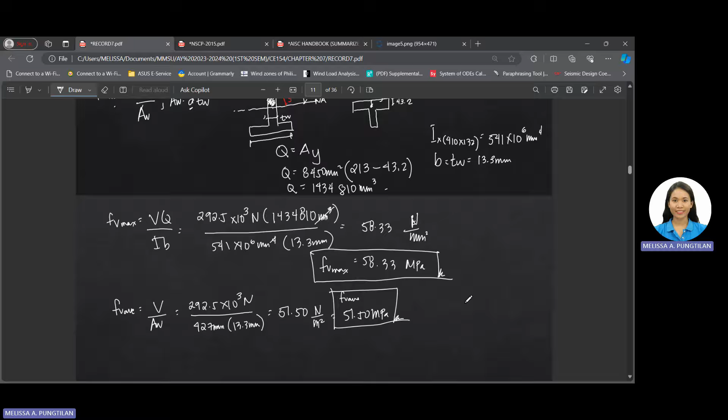So let's proceed sa example number 2. Determine the available shear strength and adequacy of an ASTM A992 W610 by 92 beam loading shown in the strong direction. Ibig sabihin na sa usual orientation yung beam natin, the axis of bending is at the x-axis or the major axis.

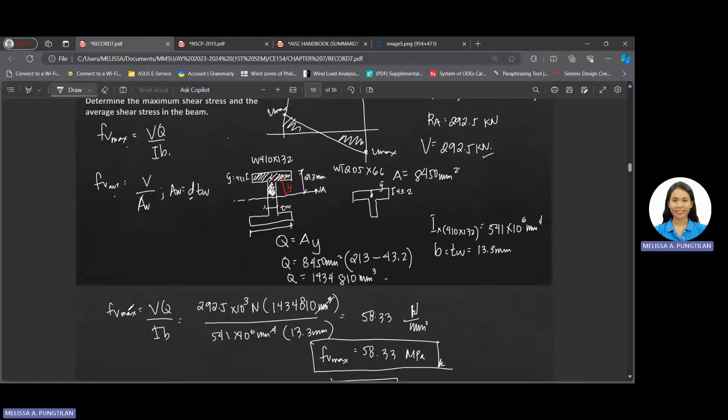So for ASTM A992, the yield strength is equal to 345 megapascal. Ang ginawa natin sa number 1 is we just tried to compute for the maximum shearing stress and then the average shearing stress, para kahit pa paano ay ma-review natin yung pagkuha ng shearing stress.

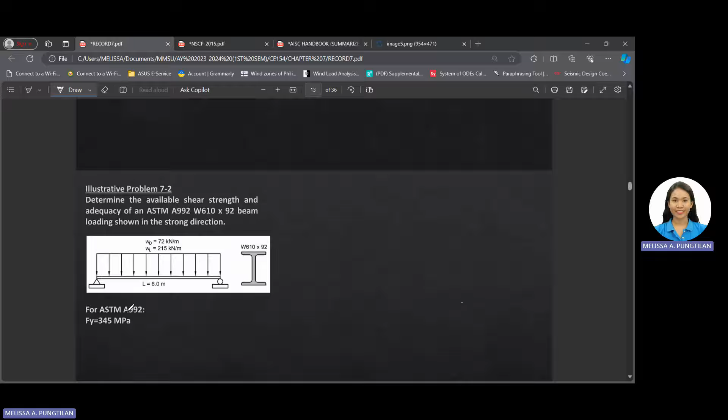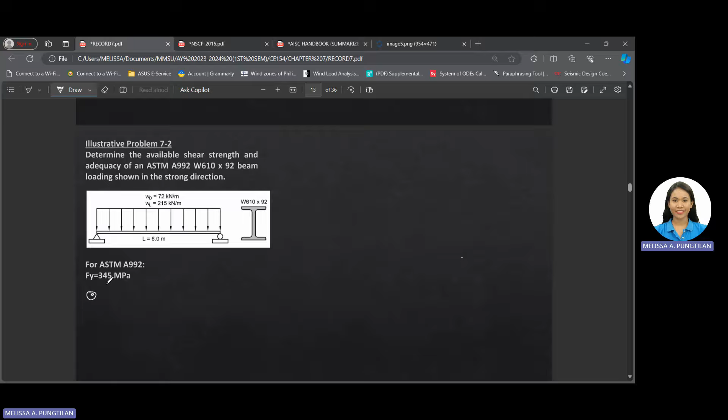At dito naman, we will now check the adequacy of the section for shear. W610 by 92 yung beam natin. Since we are verifying the adequacy of a certain beam, compute muna natin yung required shearing strength.

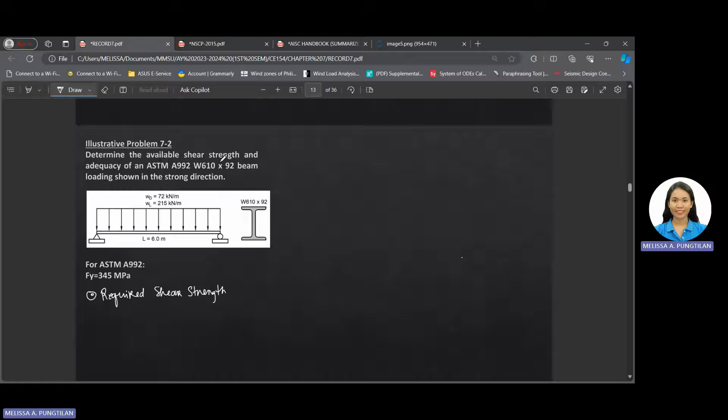Ang gagamitin natin dito is LRFD and ASD ulit kasi wala namang binanggit kung ano yung load combination o yung design natin. Therefore, compute natin dalawa. Sa LRFD, magkakaroon tayo ng WU.

Take note guys, ang hinahanap natin dito is now the shearing force. Just a review: sa tension and compression, ang hinahanap natin is the load P, kinuha natin yung PU tsaka PA. Tapos nung nag-proceed na tayo sa flexure, ang hinahanap na natin dito is the moment, the MU tapos MA. Dito naman sa shear, design of members for shear, ang hahanapin na natin dito is the VU and VA, or the shearing forces.

Dito, ang meron tayo is the uniformly distributed load. So through the uniformly distributed load, mako-compute natin yung shearing forces by drawing the shear diagram. Kasi hindi pa natin mako-compute, hindi mo naman pwedeng i-add na lang basta-basta, kasi sa LRFD, gagamit tayo ng mga tinatawag nating factor.

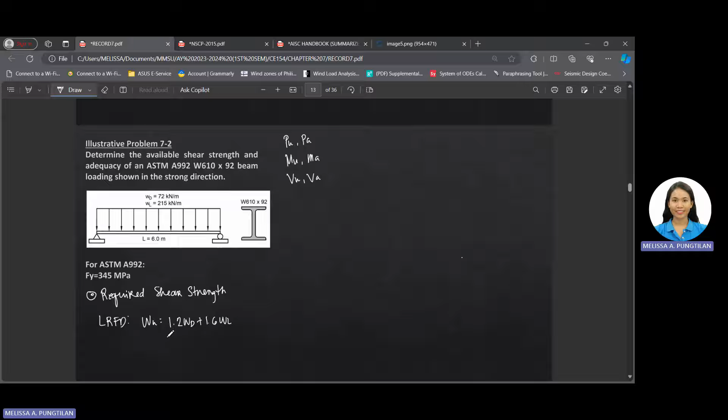Sa W, under LRFD, we have 1.2 of WD plus 1.6 of WL. Therefore, we have dead load natin is 72 plus 1.6 of 215. Therefore, we have 430.4 kilonewton per meter. Ito na yung uniformly distributed load of our beam.

After that, paano natin kukunin yung hinahanap natin na VU? By drawing the shear diagram. Pwede naman kayong mag-method of section, wala namang problema dun.

So nandito na nga yung WU, this is equal to 430.4 kilonewton per meter. Simply supported tayo. Nandito yung reactions natin, let's say RA tapos RB. Distance natin o length is 6 meters.

So by taking the summation of moment at point B is equal to 0, clockwise positive, we have RA multiplied by 6 minus 430.4 multiplied by 6, moment arm 3, is equal to 0. Therefore, RA is equal to, divided by 6, so we have 1291.2.

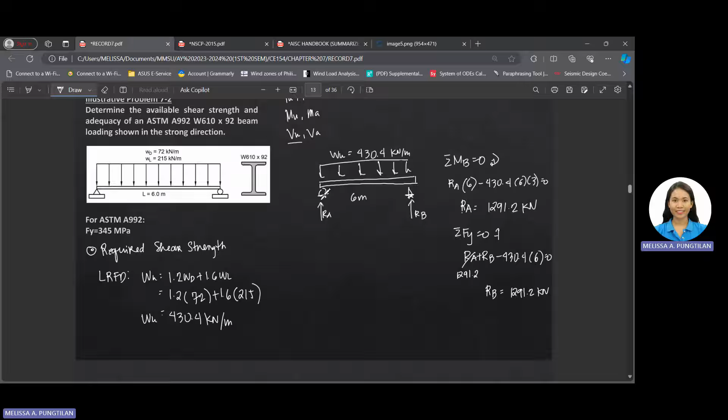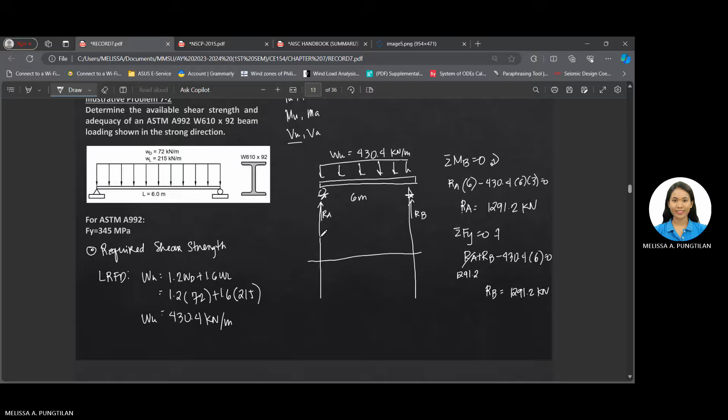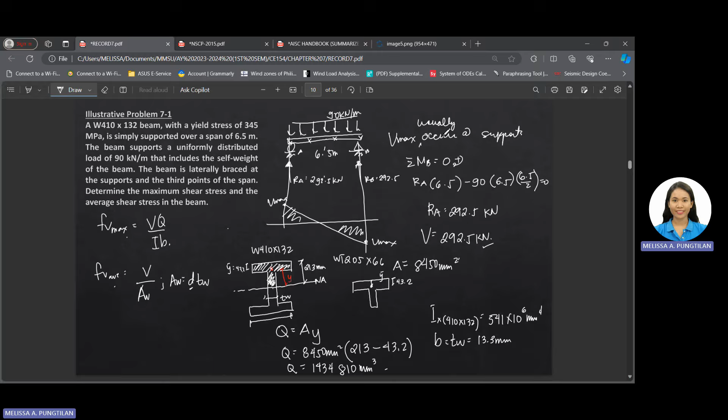Kasi this is just a uniformly distributed load, alam naman natin that the maximum shear will occur on the reaction. Kasi nabanggit ko din kanina dito sa discussion natin, that the maximum shearing stress usually occurs at the support. So kung ano yung makukuha mong reaction, yun na rin magiging maximum shearing force natin.

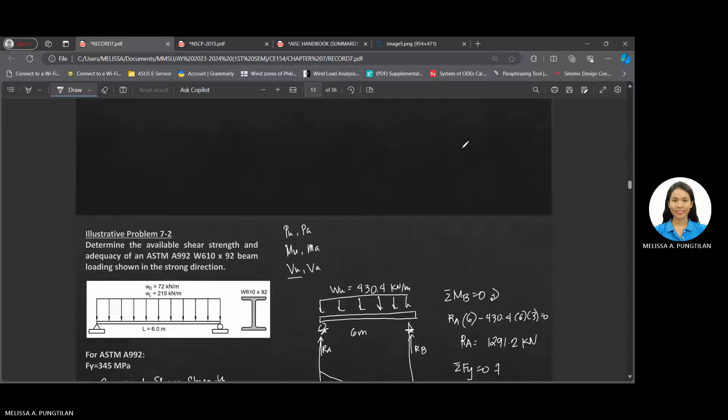Saan galing tong illustration ko na to? By having the two guiding questions: is there any vertical force at this line? Yes, we have, that is 1291.2. Next, is there any area on the load diagram? Yes, we have 1291.2 minus 430.4 multiplied by 6.

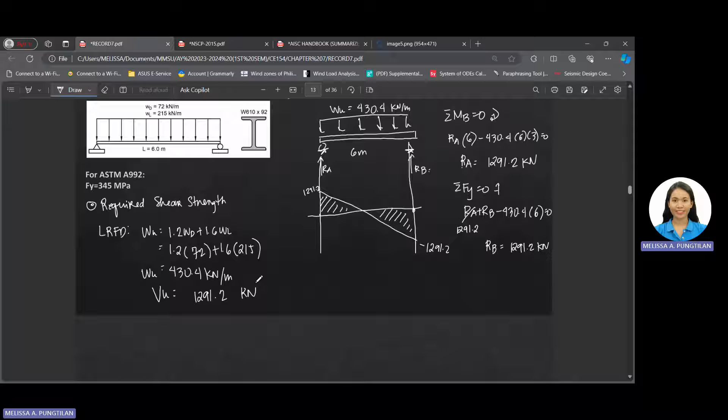Negative 1291.2. And then yung statement again natin, is there any vertical force at this point? Yes, we have RB, so negative 1291.2 plus 1291, we have 0. Kabisado nyo na yan, no? Alam nyo na yan pag drawing ng shear diagram. So yung V natin dito, or the VU now, is equal to 1291.2 kilonewton. Yan yun sa LRFD.

Paano naman sa ASD? Of course, same process. So WA, we have WD plus WL. Yung dead load natin is 72 plus 215, therefore we have 287 kilonewton per meter.

And then drawing ulit natin yung beam natin. So the loading now is equal to 287 sa ASD. This is 6 meters, simply supported. RA tapos RB.

So if we take the summation of moment at RA or RB equal to 0, clockwise positive: RA multiplied by 6 minus 287 by 6 by 3 is equal to 0. Therefore, reaction at A is equal to 861 kilonewton. Simply supported, so we can automatically assume that RA is just equal to RB, which is also 861 kilonewton.

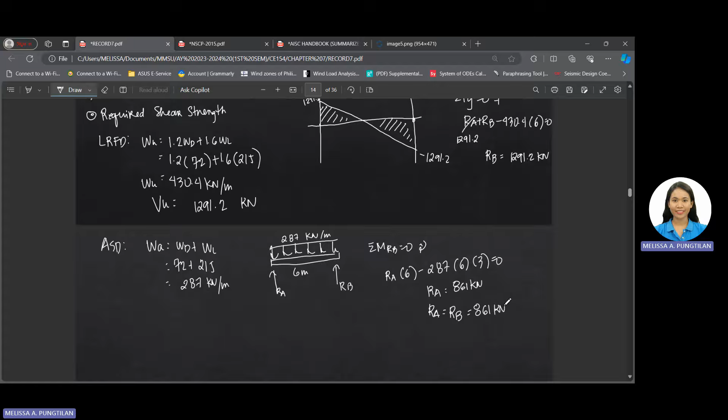For the shear diagram, if we have a uniformly distributed load, it's still the same approach. This is 861 kilonewton, and then this is negative 861. So as we can see on the illustration, the maximum shearing force VA is equal to 861 kilonewton.

So we already got the required shearing stress or shearing force. Under ASD, it's 861 kilonewton. And for LRFD, we have 1291.2 kilonewton.

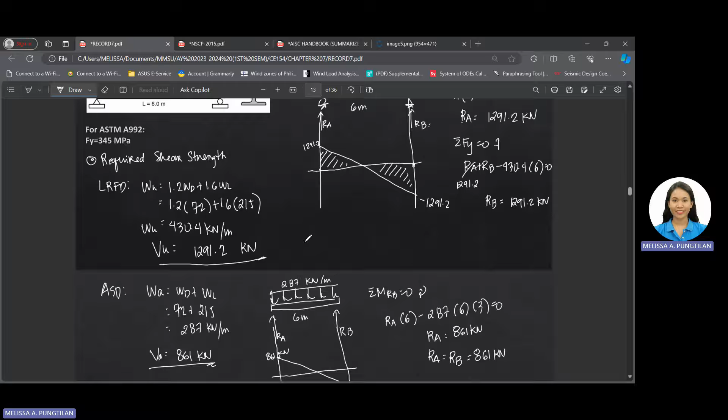After this, we need the geometric properties of our section. Our section is W610 by 92. Go to AISC and find the geometric properties for W610 by 92.

I already listed these earlier, so I'll just put them here. For our depth, we have 602 millimeters. The width of the flange is 179 millimeters. The thickness of the web is 10.9. Thickness of the flange is 15 millimeters. And our H is 527 millimeters. So these are now the geometric properties of W610 by 92.

Let's proceed to NSCP. According to NSCP, we have two scenarios or two methods presented. The first one is section 507.2, if we do not have any post-buckling strength or we don't need tension field action. The other method is if we have what's called tension field action.

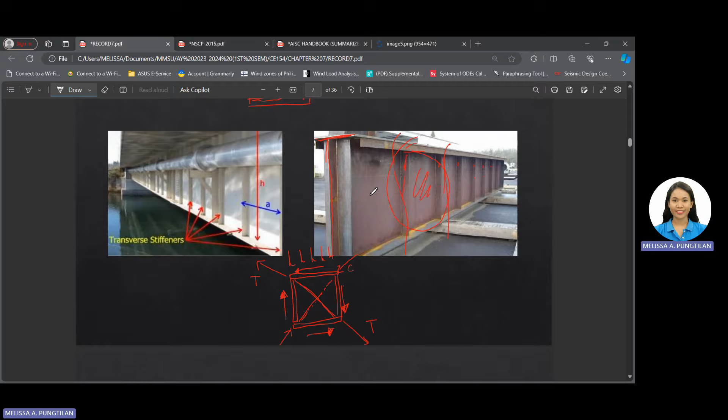So what we'll do first, to identify which section to use, is to compute if we need transverse stiffeners. These transverse stiffeners are located here - we have a formula for this. We'll check if our beam needs transverse stiffeners, whether it would undergo excessive buckling and thus need them or not. As I told you earlier, transverse stiffeners are the vertical elements that will support the web. So we'll check whether the W610 by 92 section needs transverse stiffeners or not, or whether it can stand alone to support our loadings. Let's identify first if it needs transverse stiffeners or not.

Based on the NSCP, we have a formula here. Transverse stiffeners are not required where H over TW is lesser than or equal to 2.46 square root of E over Fy, or where the required shear strength is less than or equal to the available shear strength provided in accordance with section 507.2.1. So transverse stiffeners are not needed if this equation is satisfied, or we can compute 507.2.1 first, which is the nominal shear strength - if the required shear strength is less than the available shear strength, transverse stiffeners are not needed.

If we use kv equal to 5, let's do this first - let's satisfy this and check if it's needed or not.

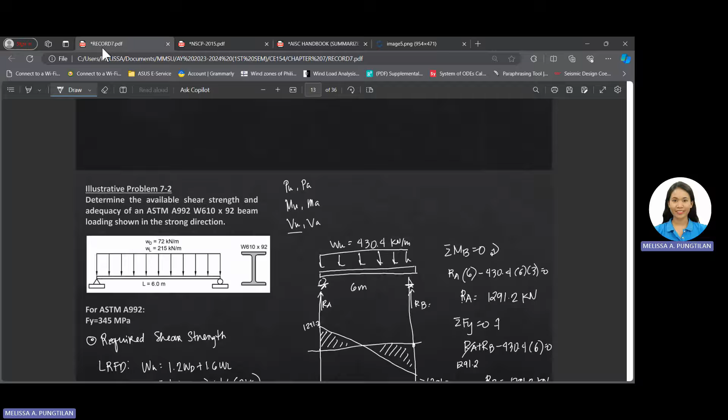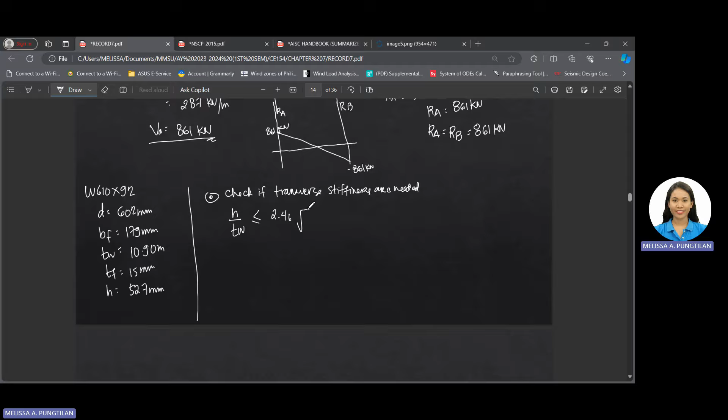After the geometric properties, let's proceed to check if transverse stiffeners are needed. Our formula: if H over TW is lesser than or equal to 2.46 square root of E over Fy, transverse stiffeners are not needed.

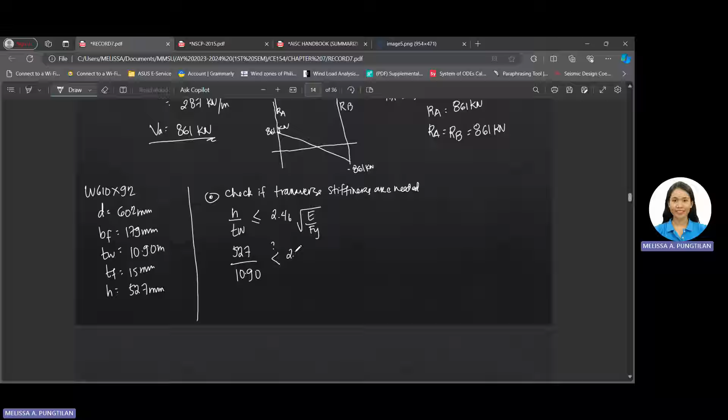Our H here is 527, thickness of the web is 10.9. Is it lesser than 2.46 square root of 200,000? Our Fy according to the problem is 345 megapascal, so divided by 345. So 527 over 10.9, we have 48.35, and it is lesser than 59.23.

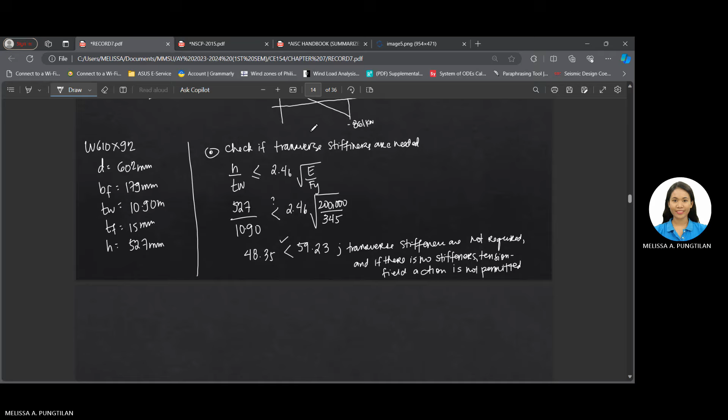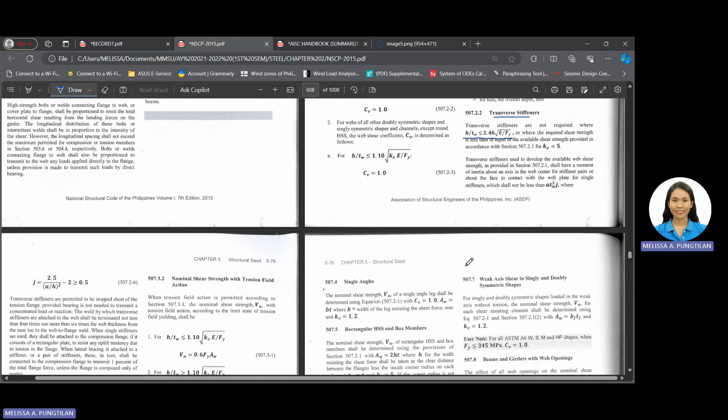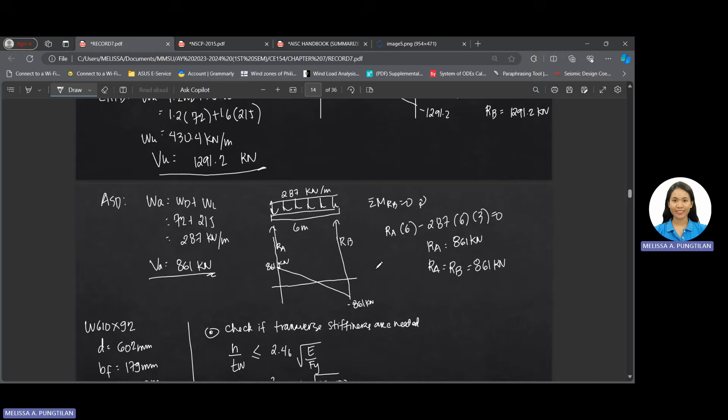Therefore, transverse stiffeners are not required. And if there are no stiffeners, tension field action is not permitted. According to NSCP, transverse stiffeners are not required if this given equation is satisfied. So if transverse stiffeners are not needed, it means tension field action will not occur. As I told you earlier in our discussion, tension field action happens if we have transverse stiffeners. But since our section doesn't need transverse stiffeners, therefore tension field action will not occur.

So we will use the first method, which is 507.2, members with unstiffened or stiffened webs. For the nominal shear strength, we will use this formula. This section applies to webs of singly or doubly symmetric members and channels subject to shear in the plane of the web. So the nominal shear strength of unstiffened or stiffened webs, according to the limit state of shear yielding and shear buckling, is computed as follows.

So Vn, or the nominal shear strength, is equal to 0.6 multiplied by the yield strength. AW is the area of the web, but take note that the area of the web is computed as D multiplied by TW.

And then for CV, we have different formulas depending on the shape. For webs of rolled I-shaped members, CV is equal to 1.0. And for webs of all other doubly symmetric shapes and singly symmetric shapes, CV is equal to 1.0. Then we also have formulas for other sections.

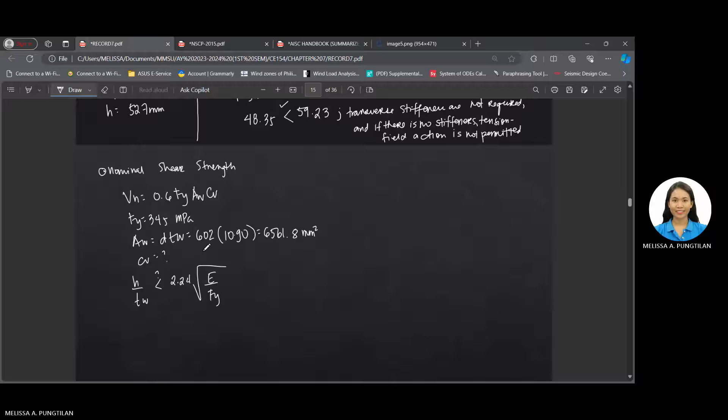Our H is equal to 527 divided by the thickness of the web, which we already computed earlier as 10.9. So is it lesser than 2.24 square root of 200,000 divided by 345? This one is 48.35, and this one is equal to 53.93.

So it's satisfied, since 48.35 is lesser than 53.93, we can use what's stated here. So our phi, or the resistance factor, is 1.0.

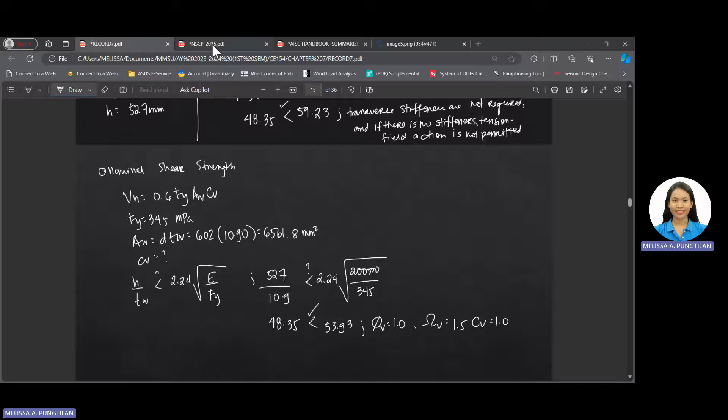So phi V is equal to 1.0. The safety factor or the omega is equal to 1.5. And then CV is equal to 1.0. Again, it's satisfied because of this equation, so we can use what's mentioned here.

Therefore, our Vn now, or the nominal shear strength, is equal to 0.6 multiplied by 345 Newton per square millimeter, multiplied by the area of the web, 6561.8 square millimeter, multiplied by CV, that is equal to 1.0. Therefore, the nominal shear strength is equal to 1358.29 kilonewton.

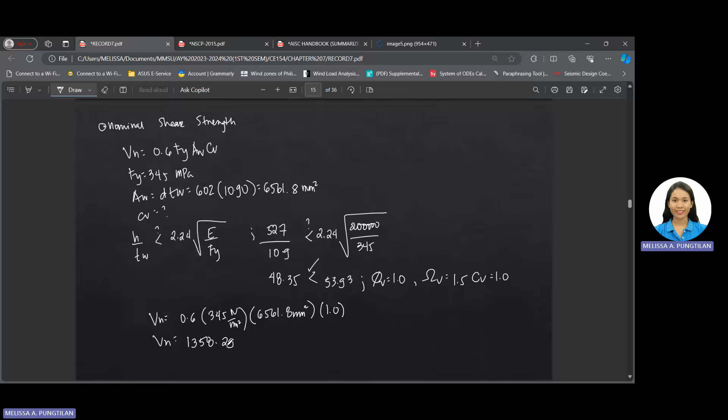Therefore, for the available shear strength under LRFD, we have phi V Vn. The phi we'll use here is 1.0. We have 1.0 multiplied by the nominal shear strength, we have 1358.29.

Therefore we have 1358.29 kilonewton. And then for ASD, Vn divided by the omega or the safety factor, we have 1358.29 kilonewton divided by the given 1.5. So this is equal to 905.53 kilonewton. So these are now the available shear strength.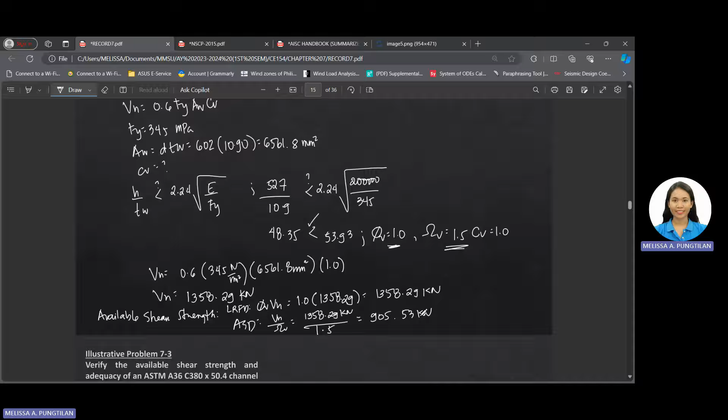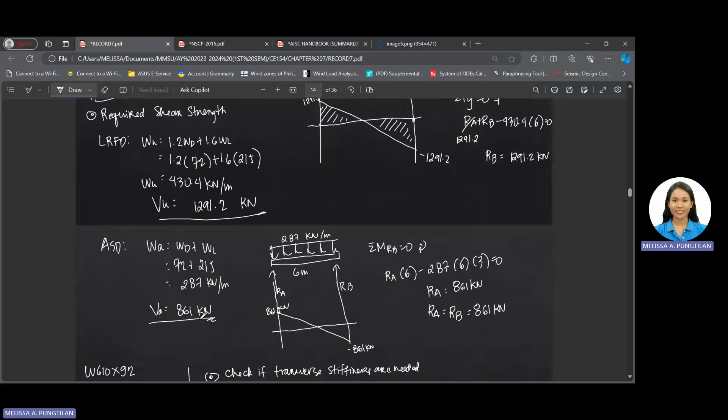So let's compare to the required. The required shear strength under LRFD is 1291.2, and then for ASD we have 861. So obviously this is greater than 1291.2 kilonewton, and this one is greater than 861 kilonewton. So it's safe.

Therefore, the section is adequate. The section is adequate, so no need for transverse stiffeners. So the beam won't buckle right away. No need for transverse stiffeners, there won't be any tension field action. The section is adequate.

As mentioned earlier, phi is equal to 0.9 and omega is 1.67. We only apply 0.9 and 1.67 if our section is not 507.2.1 number 1. That's for all provisions in this section except section 507.2.1 number 1 — for that one, phi is equal to 1.0 and omega is equal to 1.5. So only for that specific part does phi v have a specific value of 1.0 and omega of 1.5. The other sections are equal to 0.9 and 1.67.

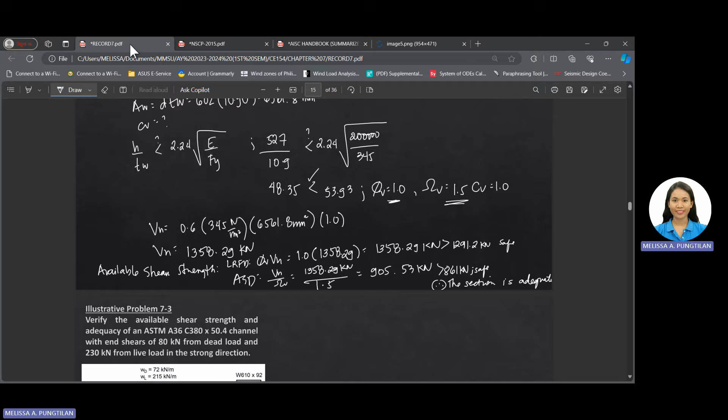So let's proceed to example number 3. Verify the available shear strength and adequacy of an ASTM A36 C380 by 50.4 channel with end shears of 80 kN from dead load and 230 kN from live load in the strong direction.

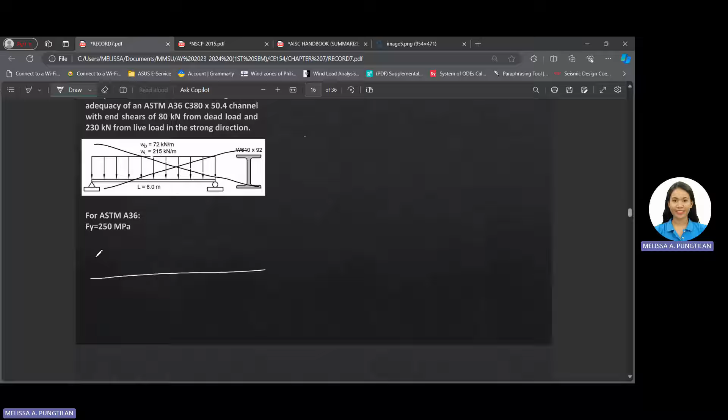So end shears means it's located here - at the end, right? End shears. The dead load is equal to 80 kN, and the live load is equal to 230 kN. End shears: dead load 80 kN, live load 230 kN. So the shear diagram for this problem is given.

Given: end shears, live load 230 kN, and dead load 80 kN.

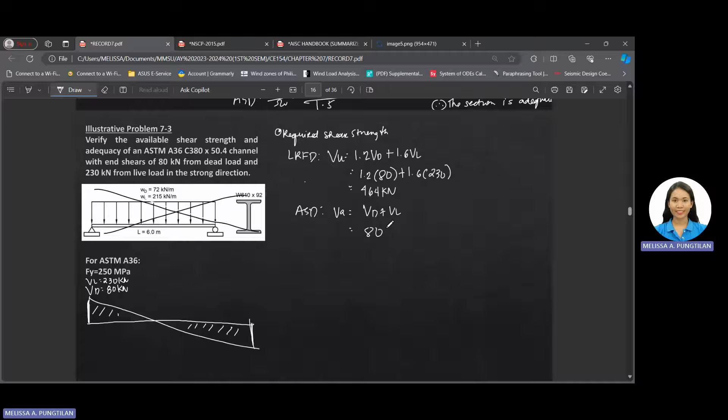And for ASD, VA, we have VD plus VL. Dead load 80, live load 230, therefore we have 310 kilonewtons. So these are now the required shear strength under LRFD and ASD.

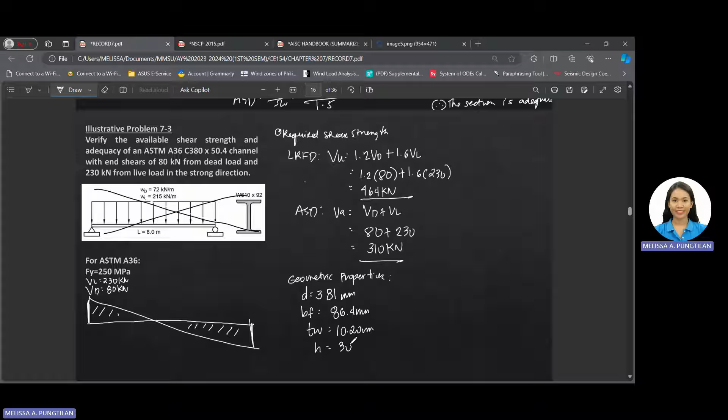D is equal to 381 millimeters, the overall depth. Width, we have 86.4. Thickness of the web, 10.2. H, we have 308 millimeters. So this is now the geometric properties of this section.

Let me clarify - what we used for the area of the web is the depth, not H, because the depth is what resists the shearing force, the overall depth. What do we mean by that? We have a C-section, so the depth is this one here. The H is somewhere here.

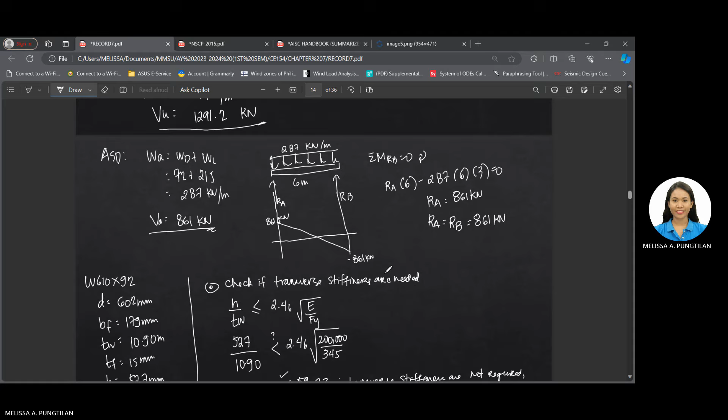So that is now the geometric property. Next, like in our first example, after computing for the required shearing stress, let's check if transverse stiffeners are needed so we know which section or method to use.

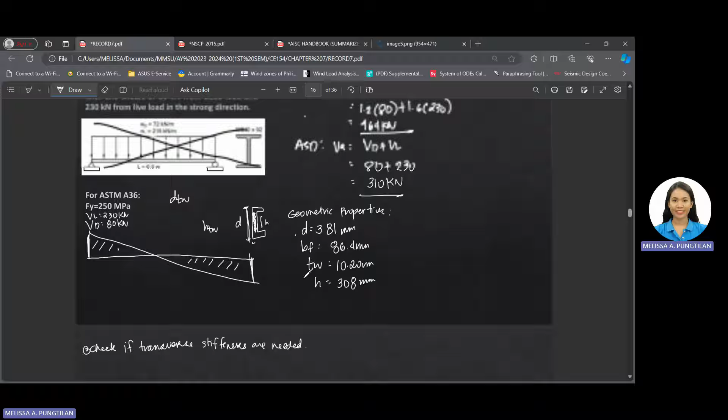So, check if transverse stiffeners are needed - can our section carry the loading of 230 kN and 80 kN without transverse stiffeners? Can it carry this without buckling?

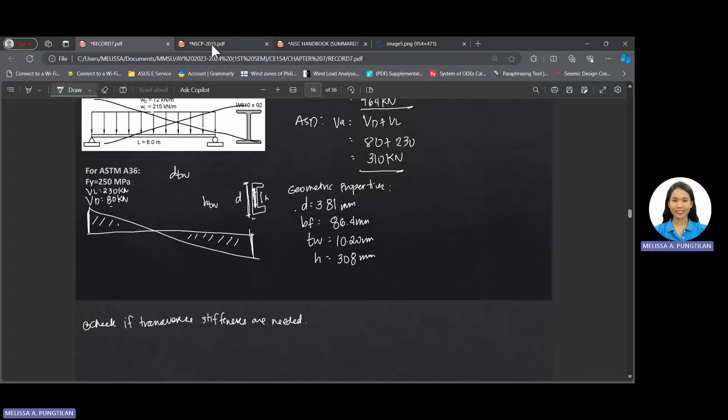Okay, let's check. Let's go to the NSCP. Let me erase the rest and check if transverse stiffeners are needed. For this one, we'll satisfy this - if this formula is satisfied, then transverse stiffeners are not required. So why did I use this?

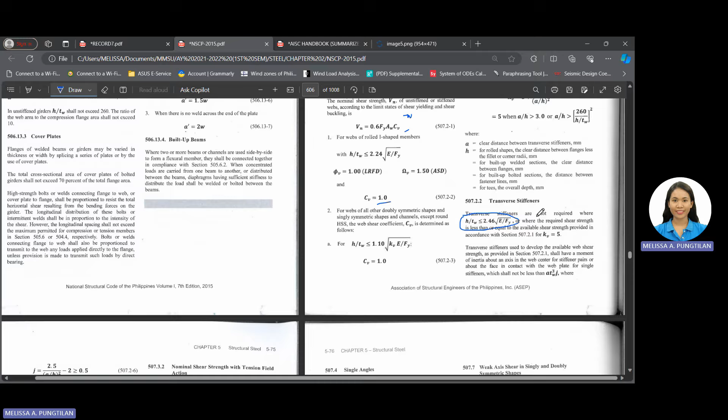Why 507.2? Because this section applies to webs of singly or doubly symmetric members and channels. Our section is a channel, so that's why I used 507.2.

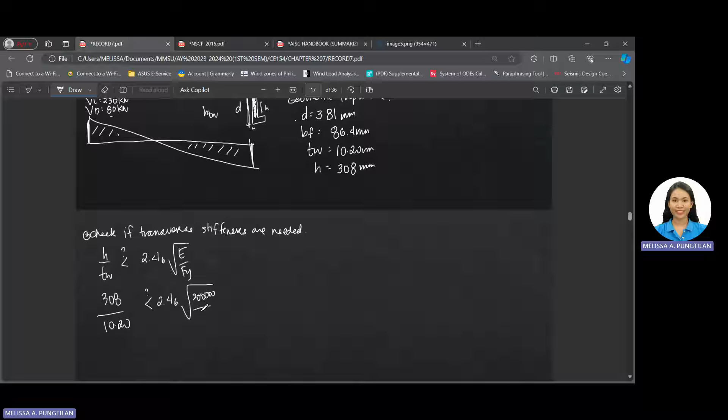Let's compute: what is H over TW? Is it lesser than... what was it again... 2.46 times square root of E over Fy. Our H is 308, thickness of the web is 10.2. Is it lesser than 2.46 times square root of 200,000 divided by Fy? Our Fy is 250 based on the problem.

So, 308 divided by 10.2 is equal to 30.20, and it is lesser than 69.58. Therefore, transverse stiffeners are not required. Since there are no transverse stiffeners, there will also be no tension field action.

Transverse stiffeners are not required. Also, tension field action is not permitted. So, after that, since we don't have any computation for transverse stiffeners because it's not needed, we can proceed to the nominal shear strength.

For the nominal shear strength, we're in section 507.2. For webs of rolled I-shaped members - that's a C-channel, our section - so that's not applicable since our section is not I-shaped. Next, for webs of all other members, doubly symmetric shapes, singly symmetric shapes, and channels, except round HSS, the web shear coefficient CV is determined as follows.

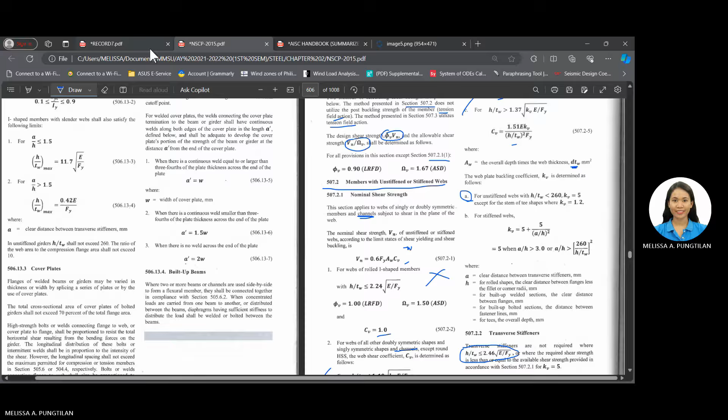Our web is unstiffened since we don't need transverse stiffeners. We already computed earlier that we do not need any transverse stiffeners, therefore our web is considered unstiffened. So is h/tw lesser than 260? Yes. Since h/tw is lesser than 260, KV is equal to 5.

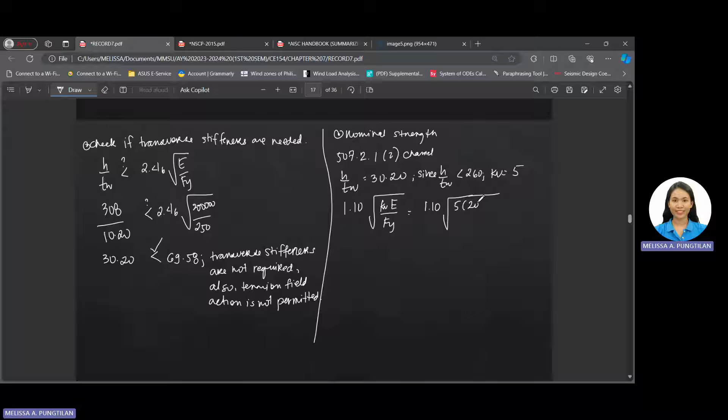So the value of KV is equal to 5. Let's substitute: we have 1.1 square root of 5 times modulus of elasticity 200,000 divided by 250. This is equal to 69.57. So this is the value of our h/tw. This is the 1.1 term. Even without computing the other one, the 1.37, I can already see where this falls. Is this our h/tw? 30.2, and the 1.1 term is 69.57 - it's already within this range.

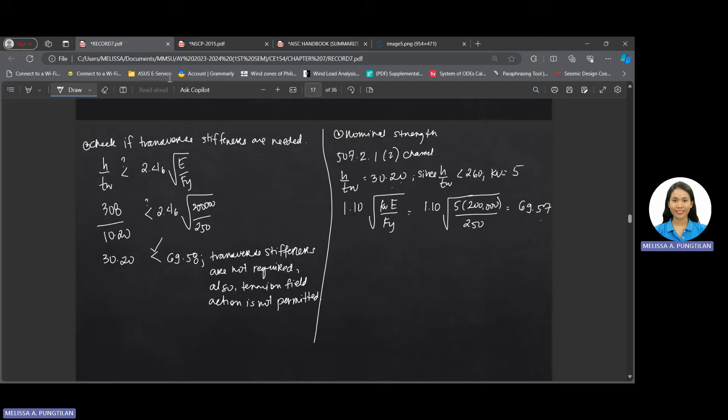So there's no need to compute the 1.37 term. We'll use option A. Since h/tw is lesser than 1.1 square root of KV E over Fy, CV is equal to 1.0. Therefore, our Vn is now equal to 0.6 Fy times Aw times CV.

So our nominal shear strength is computed by this formula from the NSCP: Vn is equal to 0.6 Fy times area of the web times CV. We have 0.6 of 250 Newton per square millimeter. Area of the web is depth multiplied by thickness of the web. The depth is 381, thickness of the web is 10.2, and CV is 1.0. Therefore, the nominal shear strength is equal to 582 times 10 raised to 3 Newton.

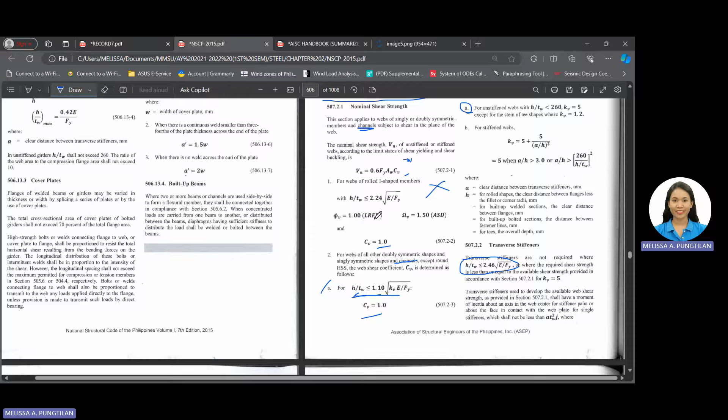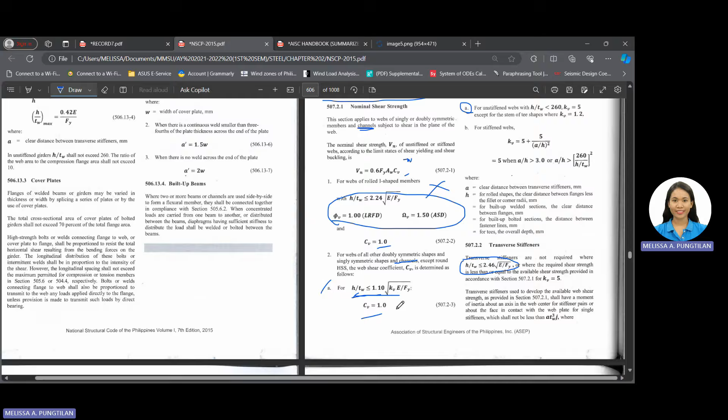Or 582.93 kilonewton. Now, computing for the available shear strength. For LRFD, we have phi V Vn. What phi V will we use here? The phi V we'll use is 0.9 - we can't use the other one because that's solely for number 1. Since we're on number 2, the resistance factor phi is equal to 0.9.

And our omega is 1.67. So we have 0.9 multiplied by 582.93, giving us 524.64 kilonewton. And then for ASD, we have Vn divided by omega. So we have 582.93 divided by 1.67, giving us 349.06 kilonewton. So this is now the available shear strength.

Let's compare it to the required shear strength: we have 464 and 310. It's obviously greater - it is greater than 464, and it is also greater than 310. Therefore, our section is safe and adequate to carry those shear forces. Therefore, the section is adequate.